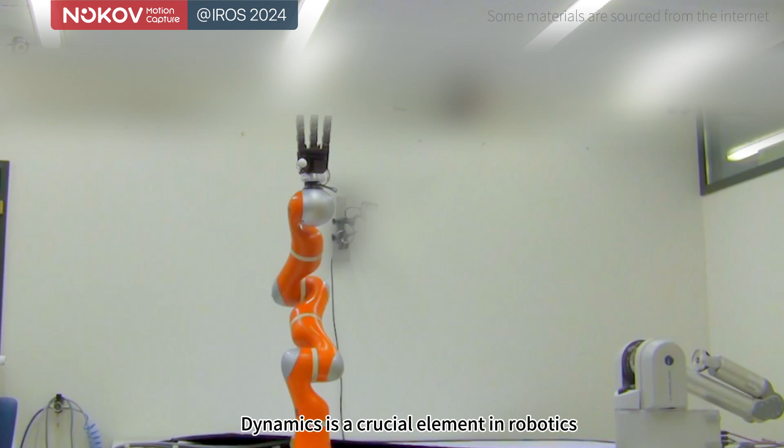Dynamics is a crucial element in robotics, which may stem from the uncertainty of the environment, the robot's rapid movement, or the swift switching between tasks. Therefore, in our robotics research, we must never overlook the importance of dynamics. If we disregard dynamics, our robots could easily regress into mere automated machines.

In recent years, machine learning has injected new vitality into robotics research. Starting with deep learning and advancing to the current large models and AIGC, these cutting-edge technologies have brought significant advantages in enhancing robots' perception, learning, planning, and control abilities.

However, on the other hand, we have also noticed that the introduction of machine learning has shifted our focus from dynamics to generalization. In practice, we might focus too much on generalization and inadvertently overlook the challenges posed by dynamics.

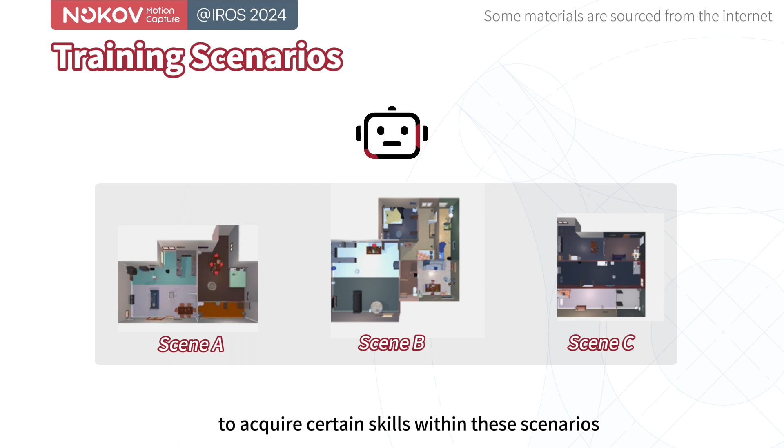For example, when using machine learning, we tend to prepare a large amount of training data and scenarios in advance, allowing the agent or robot to acquire certain skills within these scenarios. During testing, we often opt for new, unseen scenarios, but these are often static. In reality, the existence of dynamics means that many of our existing algorithms will face new challenges.

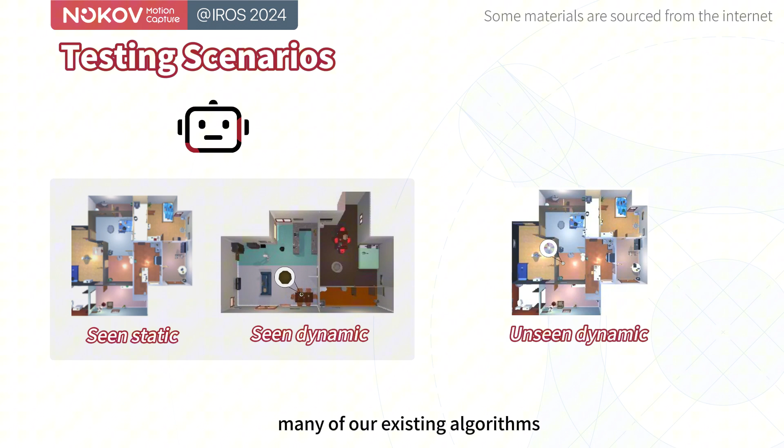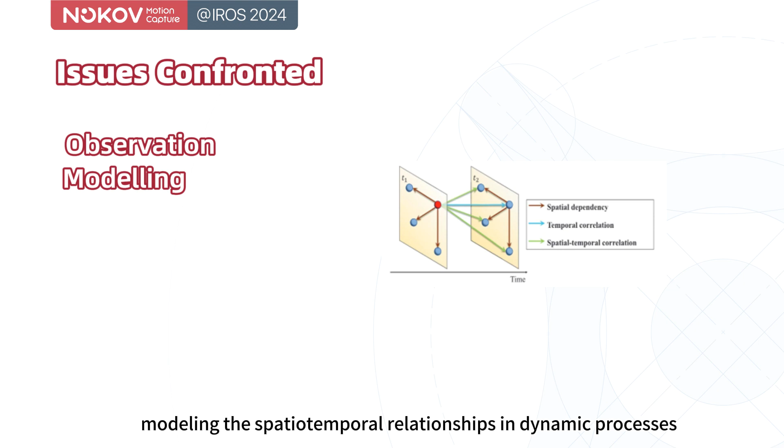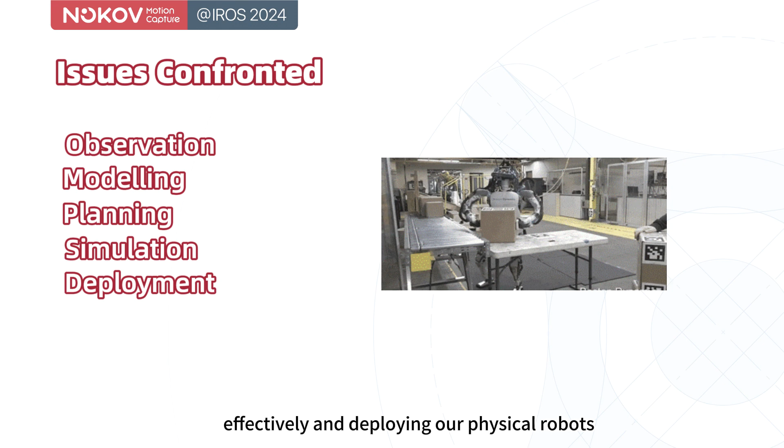As a result, in recent years, scholars from countries such as the US, Europe, Japan, and China have been exploring how to address the challenges posed by dynamics when we integrate machine learning techniques into robotic tasks, such as perception and learning. Specifically, the issues we need to tackle include observing dynamic phenomena, modeling the spatio-temporal relationships in dynamic processes, achieving real-time planning in dynamic environments, simulating dynamic characteristics effectively, and deploying our physical robots in actual dynamic environments. These are pressing academic problems that we need to address.

Furthermore, we must consider the dynamic characteristics introduced by the environment, objects, and humans, as well as the dynamics involved in multi-agent collaboration and interaction. Thus, today's main topic is the significance of dynamics in robotics.